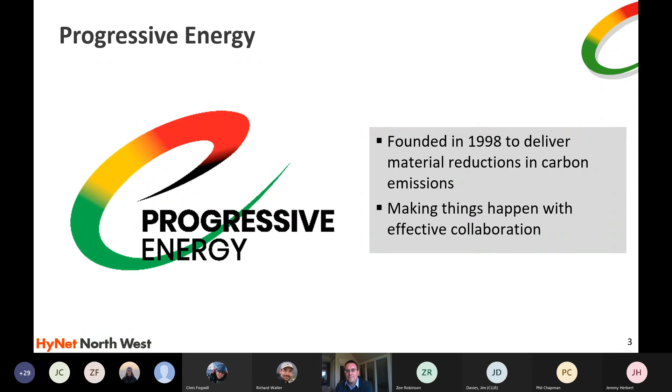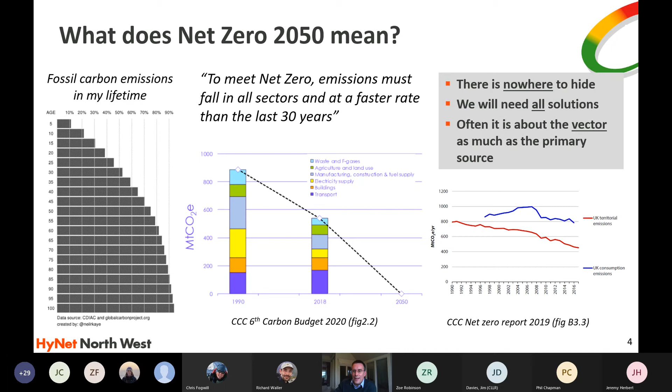But net zero, what does it mean? Net zero means there is nowhere to hide. When we had an 80% reduction, it was amazing how many organisations, sectors thought that they would get the remaining 20%. Actually now we need all the solutions in order to do it. And one of the themes in what I'm going to talk about today is it's not just about what the primary source of energy is, but it's about the vector that gets the energy from where it arises to where we need it. So I'm going to pick through some of the key energy demands that we have in the UK and look at what their drivers are to change them and what potential solutions there are.

So industry is a big emitter of CO2. Why does it need to tackle its carbon intensity requirements? Well, one is that there is now an increasing corporate and social responsibility that organisations are under in order to actually demonstrate that they're doing the right thing. That's driven quite significantly by customer demands. So customers actually want products, solutions that are low carbon, and investors want to invest in low carbon solutions.

But the other side of it is actually a really quite significant economic threat. Across the world, generally, particularly in the UK and in Europe, we are starting to price carbon. So if we emit carbon, you have to pay to do so. And when you look at the profitability of a lot of our organisations in the UK, so the profit margin they've got relative to the size of the carbon charges that they could get over the next 5 to 10 years, that really does place a significant economic threat. So industry needs to tackle it.

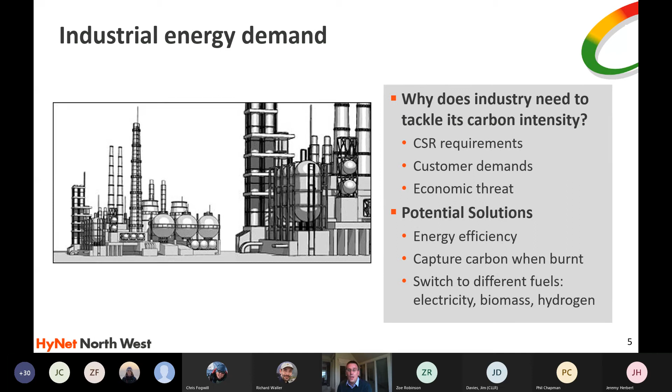What are the solutions? Well, obviously they can be more energy efficient. Where they have burnt or they have created carbon dioxide, they could capture it, or where they're using energy, they could switch to different fuels. So typically from natural gas, could go to electricity or to biomass or to hydrogen.

Let's pick another area, domestic heat. What are the challenges in decarbonising domestic heat? Now, the graph in the middle, I'm sorry, it's not terribly clear, but it's an old version of a graph that Robert Sansom did at Imperial College, must be over a decade ago now. There have been other versions of it since. But what you can see in red is actually the half-hour demand of gas over a year. And what you can see in grey is the half-hour demand of electricity across the year.

And we all tend to think that electricity demand varies quite significantly during the day and to some degree over the year, but mainly during the day. You know, when everyone comes home, they put the kettle on, they put the TV on, that kind of thing, then you get a bit of a spike. But look at it, the spike is nothing like the variation that you actually get on the gas network, both within a day, so in the middle of the night when no one's got their heating on, nobody's cooking, it's relatively low. Everybody gets up at a similar time in the day, massive firing up of boilers across the country, cookers going on, all sorts of things, and the same kind of thing at around tea time when people come home.

And then you look at the variation that you get during the year. You know, on a July summer at 3 a.m., there's hardly any gas flowing around the network. But in December, when it's bitterly cold and there's a high over the country, you can find the demand is enormous. So that is how the energy is currently being delivered. And 23 million homes in the UK are on gas. That's around 83% of them.

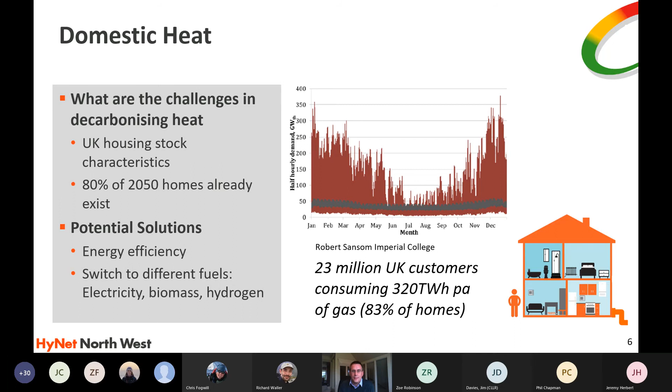Dispatchable power. So dispatchable power means power when we need it. We have had brilliant progress here in the UK in terms of our renewable electricity, an absolutely massive increase, and I'll show you some of the graphs in a little while. The challenge, of course, is that the sun doesn't always shine, the wind doesn't always blow. How do we balance the system? What happens when we've got a high over the country in winter and none of the wind turbines are moving, and yet it's very cold and we need energy?

Furthermore, how do we handle the increases? So we know electric vehicles are becoming increasingly how we get around, and we'll talk about that in a moment as well. And that's absolutely right, but that will add a burden to our electricity system, and heat pumps will also add another duty to that.

So how do we handle dispatchable power? Well, one is to look at our demand patterns and try to shift them. One is to store electricity. That's certainly possible, but actually batteries at grid scale haven't been fully developed yet and are very costly. We could have power generation we can bring online very rapidly. And currently we do that with natural gas. How can we do that in the future? I think 2 very key ways are either to use hydrogen for that power generation, or you generate from gas and you have CO2 capture.

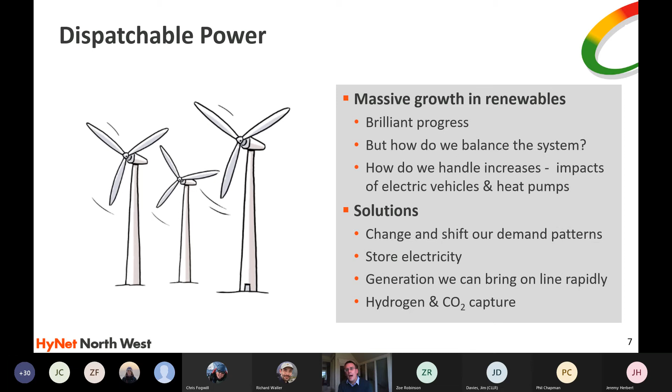So some of those key areas we've now covered: industrial, domestic heat, dispatchable power, and then the final one we're looking at is mobility. And electric vehicles are clearly gaining traction rapidly. We've had strong policy signals for that. I don't think in 20 years we will believe what we did today.

So the fact that in Oxford Street you might have effectively 1,000 small incinerators, combustors burning fossil fuel in the middle of a pedestrian-filled area in a city, which is what we are still doing today, will be as much an anathema in 20 or 30 years as it is that we used to burn coal and other smoky fuel for fires in cities in years gone by. I think that will move forward, and we will definitely see electrification. It makes a lot of sense.

But what about larger vehicles, buses, heavy goods vehicles, and even trains beyond electrification range? What are the challenges? They need a bigger range. They've got a charge time that they would need to handle. You know, a big HGV runs the risk of most of its payload becoming the battery that is there to power it. So what are the solutions?

So one is to find biofuels that can just drop in for what liquid fuels happen today, and we all do that at the moment. There's up to 10% biofuels that we find in our fuel mix today. But that only gets us so far.

Substitute, so CNG, compressed natural gas, and we can use bio-natural gas, so from anaerobic digestion. And we're seeing an increasing number of large trucks running on compressed bio-natural gas here in the UK, which is a good solution. But ultimately, the other one is potentially hydrogen too. So a range of solutions.

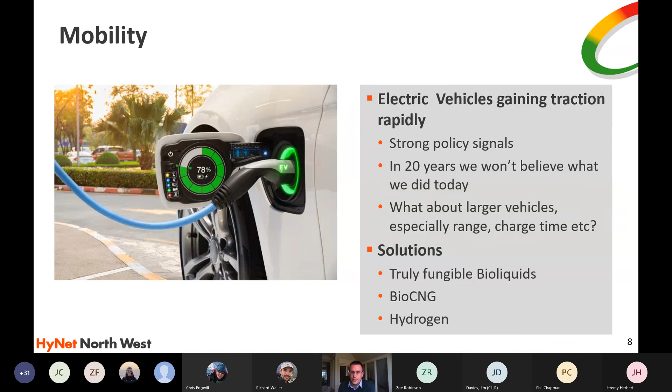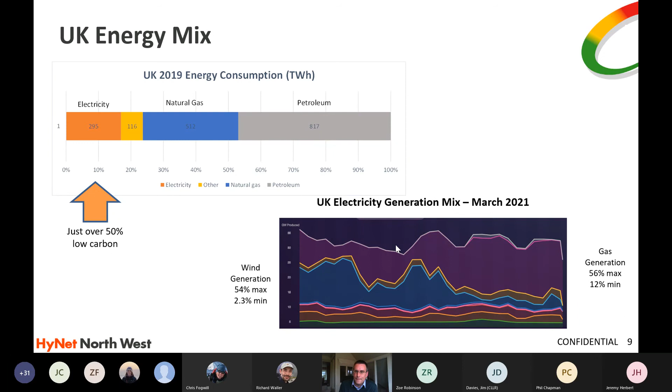Meanwhile, on the gas, which is this pinky one up here, 56% of it was at its max, but even at its minimum, it was still 12%. So looking at an annual figure is interesting, but you can see we've still got 90% of what's going on in our energy system is fossil derived. Looking on a month or a daily basis, the mix is constantly changing and we're needing to balance to deliver what it is that we need. And this is the challenge.

What have fossil fuels done for us? The trouble is they're absolutely brilliant. They're in plentiful supply. They're very energy dense and easy to transport. They're easy to store. They're pretty much always there when we need them. They are fundamentally cheap compared with other sources of energy. They're concentrated sunlight from millennia ago that have been turned into a product that is in one location, easy to get out, and provides a huge dense source of energy. And we've built the fabric of our society out of them.

So it's going to be a journey to wean ourselves off. This isn't something that you can just turn off and turn on again. If we doubled the amount of low carbon electricity we put on the system, we'd only make it from 10% of our system to around 20% of our system. So that's a huge change in electricity, but we'd still have 80% that we've got to try and tackle. The thing is, we have to find ourselves a way of weaning off, but it is going to be a journey.

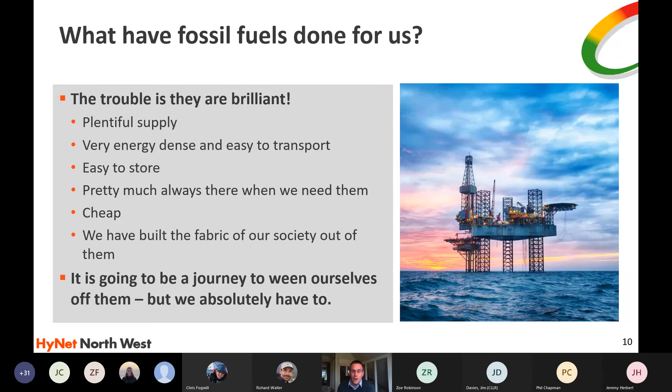And that journey has behavioural implications. We have really got used to cheap and ready energy. It was really interesting. I just took this photograph off the web. You could just go and buy a thermostat off there. Really interesting that the number on that is 22 degrees. I think if we talk to people from 20 or 30 years ago, the thought of keeping your home at 22 degrees would probably be alien to them. It is a good number of degrees higher than we used to have.

I mean, you look at this photo, it's not a great one, I'd seen a really good one somewhere, but I just wanted to show this one. This is a house clearly in winter because there are no leaves on the trees, and yet you see there are windows that are open. And I think generations before us, we tended to put jumpers on, we tended to keep the windows open, lots of air going on. We didn't keep ourselves quite so warm.

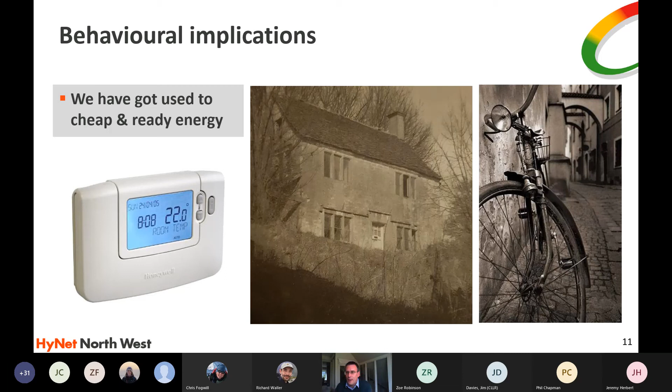And similarly, transportation. We used to walk, we used to jump on bikes. So there are going to be big behavioural implications that we're going to have to deal with as we move forward. And what we need is a suite of solutions. We need all the tools in the book to get us to net zero. So although I am now going to spend quite a bit of time talking about hydrogen and carbon capture and storage, we absolutely need energy efficiency. There is absolutely a role for our biomass resources, and there is a real role for electricity, but we need this suite of all of them to work together.

So let's talk about hydrogen. Low carbon hydrogen has now been recognised as one of the key tools in that toolbook. Whoever you look at, whether the Committee on Climate Change, National Grid scenarios, any number of consultants, or the recent government white paper, they are all clear that significant volumes of low carbon hydrogen are required. And those range from just under 200 to some even suggesting up to 500 terawatt hours of hydrogen.

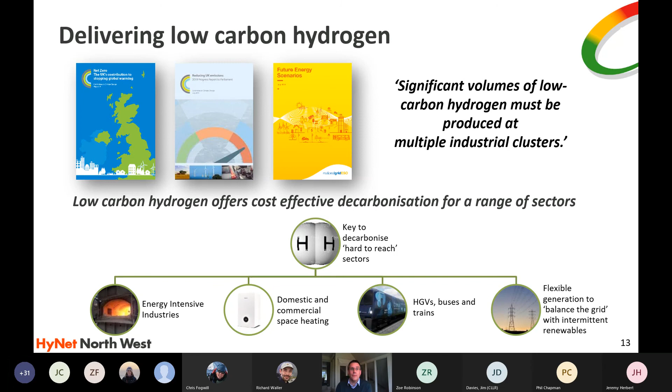Let me remind you, our domestic properties use around 300 terawatt hours across the UK. So we need as much hydrogen as is being delivered today to our domestic homes on the gas network system. And why is that? Because hydrogen gives you solutions for some of those areas I've talked about: energy intensive industries, domestic and commercial heating, transport for larger vehicles, and flexible generation to balance the grid, to enable more low carbon renewables by helping to balance them out.

Where do we get hydrogen from? Hydrogen, yes, is an abundant element, but it is not necessarily there in ways that we can use and that give us energy. So yes, water contains H2O, but we need to extract it. In that regard, hydrogen can be a source of energy, but is also importantly a vector by which energy is transferred. So there are a number of types of hydrogen. I'm going to talk briefly about them.

One, commonly called blue hydrogen, is taking the hydrogen out of something like methane and then storing the CO2. So we take methane from a gas field where it's been stored for millennia. We take the hydrogen, and then we put the CO2 back where that methane came from, back into those offshore reservoirs, and then we have the hydrogen that we can use. That's done by a number of reforming processes, and that can be done very efficiently. Up to 97% capture rate of the CO2 can be achieved.

So that's one approach. Another approach is electrolysis, taking the hydrogen in water, using electricity to split it, and then taking the hydrogen. Clearly, if it's using renewable electricity, then it is a low carbon solution. And potentially, we may be able to take the hydrogen out of biomass. Biomass, like all organic matter, is made of carbon, hydrogen, oxygen, and a few other things, and using biological or thermal processes we convert that into what's called a synthesis gas, and then upgrade that to hydrogen and CO2.

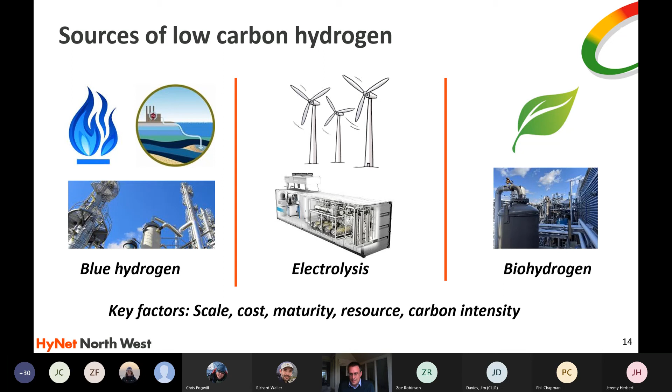Take the CO2, and then you can take the hydrogen, and then you can either just release the CO2, or better still, store the CO2, at which point, as we'll learn a little bit later, that is considered a greenhouse gas removal technique. And the key thing in determining which of these sources we use are issues like scale, cost, maturity. Do we have the resources? What are the carbon intensities? And that's one of the things that we'll cover as we go through this presentation.

I talked about that build up to get that 300 terawatt hours of hydrogen. Here I've just shown how that could build up over time and in the different sectors. So you can see industrials over time become quite a significant and important part, particularly in the 2030s, of consumers of hydrogen, and I'll show you some of the work we're doing on there. Similarly for CHP and power applications.

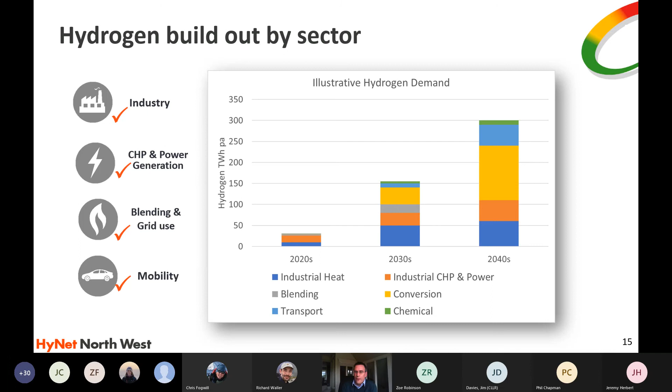You can see there's this grey area which is blending. So this is what we've done at Keele, and the project at Keele has really unlocked that. That plays a role particularly during the 20s, rising to the 30s. But then here we could envisage that parts of our gas network today using methane could convert and operate on hydrogen, and that is the yellow area that I've shown there. Then the light blue, a role for transport increasing, and then we do use hydrogen today in chemical solutions, and clearly using low carbon hydrogen is really important. So that's just a view as to how the role of hydrogen might build up by the end uses.

I'm now going to talk to you about HyNet. This is the project that we've been leading, and I'd like to consider this as a case study as to how hydrogen can be involved across our energy system. Now, this is what's called a low carbon industrial cluster, which is based, as you can see, in the Liverpool-Manchester part of the country up in the northwest. But it's also worth saying that there are other clusters around the country, in Humberside, Teesside, up in Scotland, also in South Wales, looking to do similar things, although I think the HyNet one is by far the most advanced and has hydrogen most embedded into how it is structured.

So what we have here in this cartoon, and it is a cartoon, but it shows schematically what's going on, is at the heart of it, we have a hydrogen production facility, which is taking natural gas and converting that natural gas into hydrogen and CO2. The CO2 is going down this orange pipeline, which currently is a natural gas pipeline from a gas field in the Liverpool Bay, which is currently producing natural gas and bringing it onshore, but is reaching the end of its economic life now and is absolutely suited to be repurposed as a store of CO2 flowing back down in this direction. There is a short amount of new pipeline to be built, but most of that pipeline exists, and the offshore assets already exist.

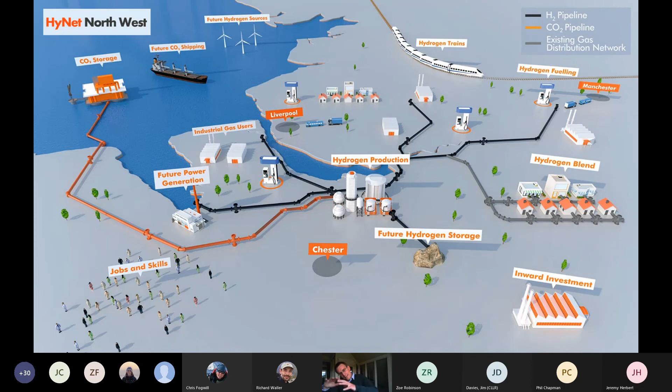So this is the map of this HyNet vision that we have put together and we are now delivering. So it is the UK's leading hydrogen and CCUS project. The government has its 10-point plan. It has set certain targets in terms of how much hydrogen production it wants by 2030 and how much CO2 it wants to store using the kind of geological formations we've talked about.

And HyNet can deliver around 80% of that hydrogen production target and potentially up to 100% of that CO2 storage target. It also has the prospect of potentially bringing home to the UK's first hydrogen village or hydrogen town actually being dedicated on 100% hydrogen, which is another part of that 10-point plan.

Now, I said earlier, Progressive is a relatively small company. We achieve what we do by working with other people. And these are some of the big organisations based up in the Northwest that we are actually partnered with in terms of delivery of the plan. And I'll show you what role they have as we go forward.

So we talked about the carbon capture and storage infrastructure. This we are developing with Eni. So Eni is the Italian state oil and gas company. Huge amount of work they've done looking at the offshore reservoirs that have been gas tight for millennia and we've used to produce natural gas as to their suitability for putting CO2 and storing it again.

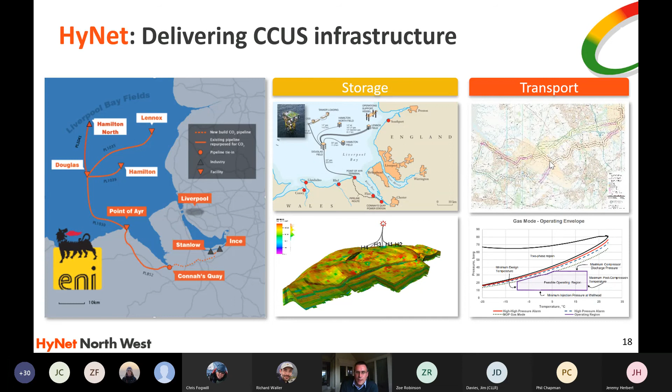An important part of that is not just taking CO2 from hydrogen production, but actually from some of our big industrials that produce CO2, not because of the fuel that they use, but because of the chemistry of what they're doing. And so we've got a fertilizer plant that will be putting nearly 400,000 tons of CO2 into the system. We're working with Hanson Cement Industry, who have CO2 production from their facilities that will link into the CO2 pipeline.

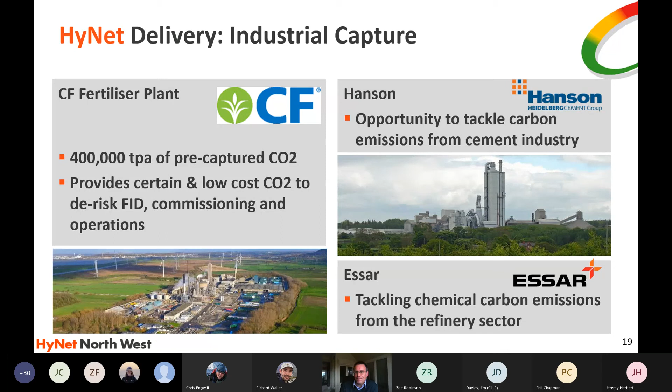And there is a big refinery up in the Northwest where some of their CO2, again, is chemical as part of their cracker. And we're working with them to capture around 800,000 tons of CO2 from that process to go into the infrastructure. But as I said earlier, at the heart of what we've got in HyNet is large-scale hydrogen production. And we're working with Johnson Matthey, UK company with world-leading technology for converting natural gas into low-carbon hydrogen, separating out the CO2, as I said earlier, with a 97% capture rate, so very high capture rate of CO2, which is then put into the infrastructure.

We're working with a large engineering contractor, SNC-Lavalin, and we're currently doing what's called front-end engineering design. So it's a FEED program that enables us to define the design of that plant. And we are in partnership with Essar, who own the refinery up there, and looking to build not only this first line, which we're working on at the moment, which will produce 3 terawatt hours of hydrogen. So come back to that 300 that we were aiming for. This is the first 1%.

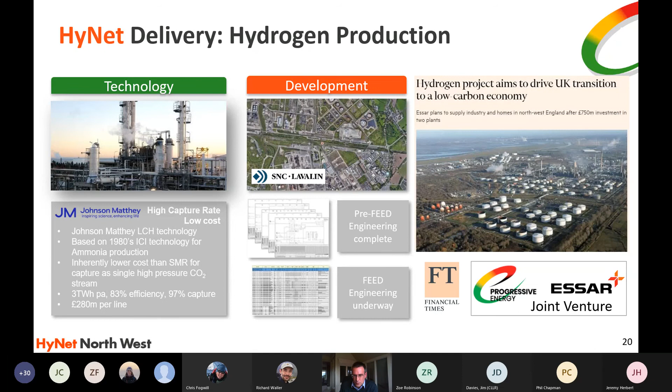But interestingly, this is of the order of magnitude of the amount of biomethane that is produced in the UK. And this is just from one plant. But actually, then we'll be looking to build a second line at double the scale pretty soon after, and then 2 larger ones that will come after that. So that's the hydrogen production.

And then we have this hydrogen distribution and storage infrastructure, which we're working with Cadent. So Cadent work in the Keele region, and they also work in the Northwest, and they will be building an 80-kilometre hydrogen pipeline system that connects the production to all those users that we talked about, and also to the storage. And then we're working with the partners, part of the INEOS company with Inovyn, who own the fields that are being used for the hydrogen storage.

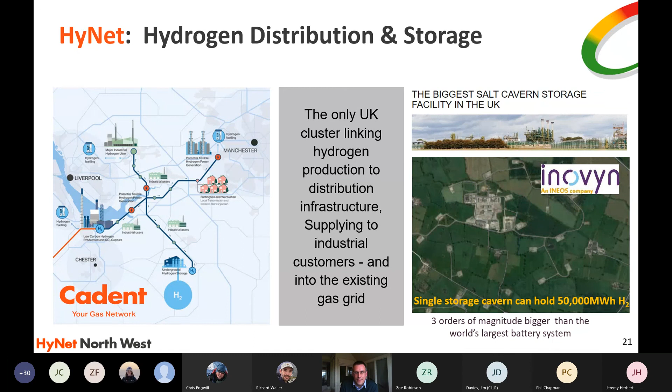We will be storing 1 terawatt hour of hydrogen. So that is equivalent to 1/3 of a year of production from that first line. And again, just to put it in context, that terawatt hour of hydrogen storage is 1,000 times bigger than the world's largest battery. So huge opportunity for storing energy simply and at low cost.

And we've done a big piece of work with a UK burner manufacturer to demonstrate that a big boiler, a big burner, could operate on 100% hydrogen. And that's because we're doing some trials with Unilever at Port Sunlight. So Unilever make a lot of the bathroom and kitchen products that we have around the UK. They want to take one of their really big boilers, which is significantly larger than, sort of 300 times larger than a domestic boiler, and operate that on hydrogen, as well as a blend.

And we're also working with Pilkington. So Pilkington's a glass manufacturer. Now they make sheet glass up in St Helens, and we will be working with them on one of their huge furnaces, which is yet another order of magnitude bigger. So we're now sort of thousands of times bigger than a domestic boiler, using hydrogen for making their float glass.

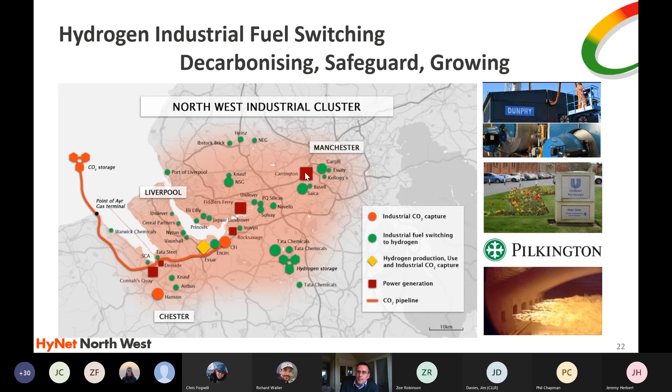Now, blending into the gas grid. Now, this is something that's obviously close to Keele's heart. So this is taking hydrogen, mixing it with the natural gas that goes into the grid, and then delivering it to consumers. And the idea is to be blending at a level where neither the consumers nor the network have to make any changes. And it's a key enabling step in unlocking the hydrogen infrastructure. So it's a non-disruptive way of doing it, so nobody has to change anything in their homes, and it's a low-cost solution for early adoption.

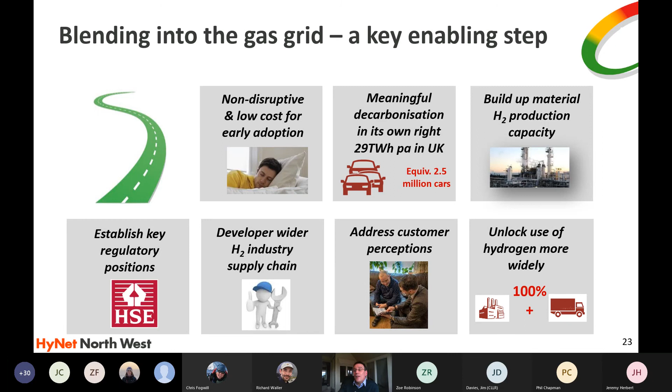It actually saves a meaningful amount of carbon in its own right. It's equivalent to taking 2.5 million cars off the road. It helps us build up hydrogen production capacity, allows us to work with the regulators, the HSE, who are hugely important in this, to keep us all safe, and therefore understand the position with blending, and as a stepping stone towards potentially converting to 100%. We build up the supply chain. We help customers get used to the fact that hydrogen will become part of our energy mix, and of course unlocks the use of hydrogen more widely.

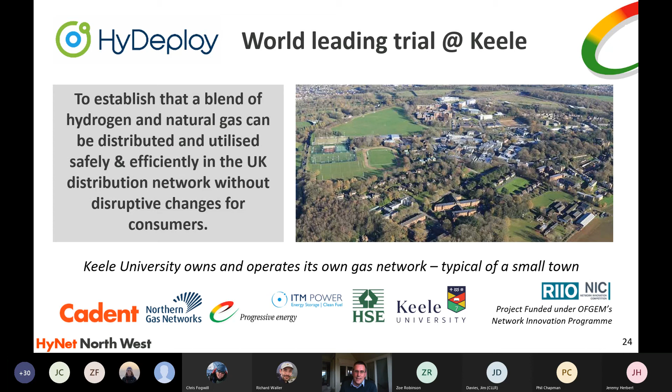So we've done this world-leading trial at Keele. It's been brilliant to partner with Keele on this. So you have effectively your own gas network, which is typical of a small town. So we took an area of your network of around 100 domestic properties and about 30 of the university buildings. So quite big commercial applications there. And the purpose of that trial was to demonstrate that a blend of hydrogen and natural gas can be distributed and used safely in the UK network without disruption for consumers. So that was the objective of the project.

We had to build the safety case. The UK has a brilliant safety and regulatory regime, and therefore we had to present evidence to the Health and Safety Executive that running at the 20% volume is as safe as natural gas. So we ended up doing around 18 months of extensive, rigorous research, including work that we did at Keele, including work we did with the health and safety laboratories in Buxton, in order to make that case, and then we secured permission for blending in November 2018.

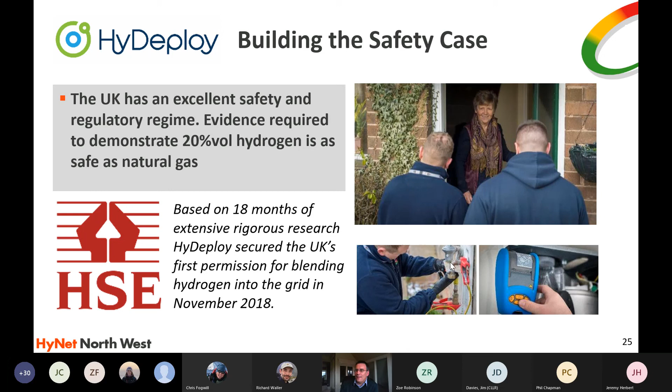And again, this was some of the work we did going around testing existing properties and existing equipment and appliances at Keele University. Having done that, we built out the facilities, and those of you based at Keele will probably be familiar with the pictures on the left of the compound which we have there, and the good work that we did with people like Paul Richards and the estates team to actually construct that equipment. So that includes an electrolyzer to make hydrogen, which then gets put into a small intermediary store before it was then blended in this facility to go out onto the network. And then we had various tests, it being a proper testing research project.

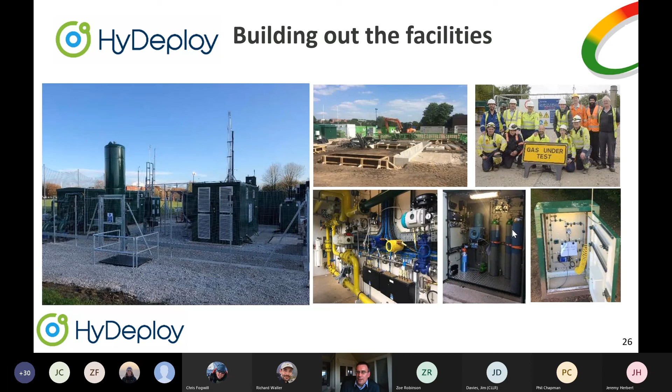We were also testing composition out on the network and took various other measurements. And then we operated, and we were operating for over 15 months. It was slightly longer than we'd intended because of COVID, but we did that, and we finished in March this year. And in fact, we are now pulling together all of the results from that, and we're really looking forward to being able to share those with our friends at Keele, but also more widely as well, because this project is seen as being really key.

One of the things we did do down in one of your big boiler houses was to take 8 boilers from 4 different manufacturers. One of each boiler was running on natural gas, one was on the blend, and those boilers were run really hard over the 15 months, effectively equivalent of pretty much a lifetime of boiler use. We've taken those off the wall. Those have now been sent to the various boiler manufacturers. Their mission is to first of all identify which boiler was running on natural gas and which one was on the blend, and if they could tell any difference.

Now, those manufacturers stood behind the boilers in people's homes for the purposes of the trial. This is about establishing that for long life, over rolling this out, they can stand behind those warranties as they sell those products. So we're collecting that data now. We had good operation, we had good network composition, and we've had no increase in leaks or faults on the network. So overall, it's been a really good project and some fantastic feedback. One of the customers said, you know, I'm contributing by doing nothing. Where else do you get to do that? So it's saving carbon by not having to make major changes.

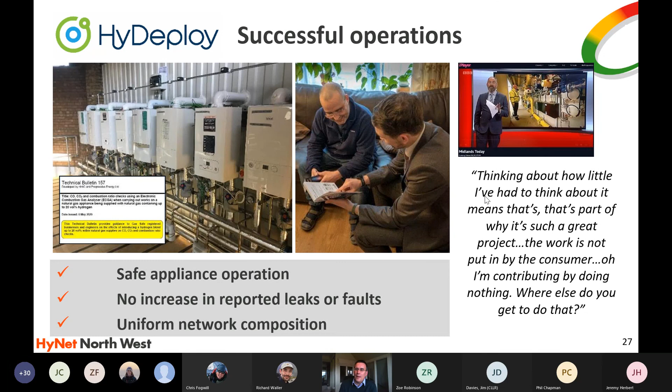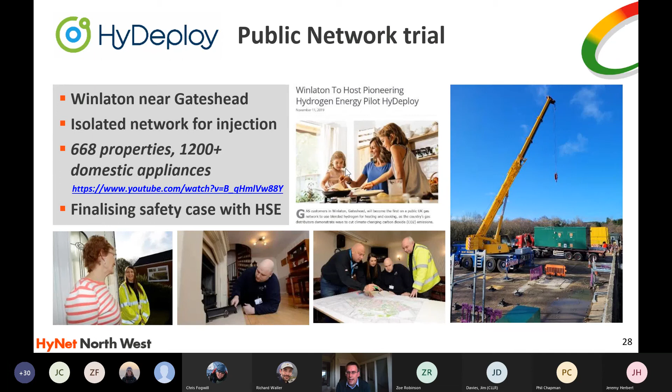So where does that lead us on to? Well, in fact, in Winlaton near Gateshead, we will be running a similar demonstration program on over 650 properties up in the northeast. So that will be over 1,200 domestic appliances. There's a really nice video from somebody involved in that, which if you just put Winlaton and NGN, so that's Northern Gas Networks, into YouTube search, you should find. Currently, we're finalising the safety case with the Health and Safety Executive, building on all the really good work done at Keele. And we're looking forward to starting to operate there, subject to getting the safety case from the HSE in the next few months.

And as I said, blending is a journey to 100% grid conversion. So boiler manufacturers here in the UK, Baxi and Worcester Bosch are the most well-known ones, have already developed hydrogen-ready boilers. So these are boilers you could go and buy today, run on natural gas, and if we end up with the transition over to 100% hydrogen, relatively straightforwardly with a gas engineer turning up, quarter of an hour, half an hour, they can just turn that over and convert it to run on hydrogen.

So there's lots of work being done in the UK, some big programs looking at the kind of safety cases we've put together for Keele, but for 100% hydrogen. And as part of that 10-point plan from Boris, we are looking to see a hydrogen neighbourhood by 23, a full hydrogen village by 25, and a town by 2030. This is a journey that we can be on and that can help decarbonise parts of our system.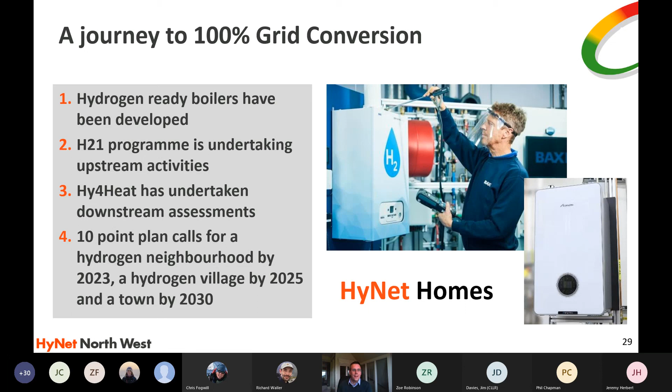Now, as I said earlier, I would love to see heat pumps playing the role that they need to play. New build properties, I can see they have a really key role. Properties that we can insulate well and effectively, they have a key role too. But there's a tranche of properties for which I think hydrogen offers a solution of direct, rapid heating, allowing us to get the heat into properties at the time that we need it. We need a patchwork. We need a mixture of all of these solutions.

One final thing before I close is called greenhouse gas removal technologies, GGR. So when you look at what the Committee on Climate Change has reviewed that we need to do to meet our net zero targets, we will achieve a lot by saving carbon from actually going out into the atmosphere. But at the end of the day, we're also going to need some ways of effectively removing carbon dioxide from our biosphere. And how can we do that? So one way is what's called direct air capture. And on the right-hand side, there are some schematics of ones that were produced by the IMechE a number of years ago.

They're supposed to take CO2 from the air, capture it, and then take it away and sequester it. Now, the challenge with that is that air is just around 400 parts per million CO2. Now, that's a major problem, and it's the fact that it's going so high that it's causing a problem. But from a chemistry perspective, capturing that CO2 at atmospheric pressure is really quite difficult.

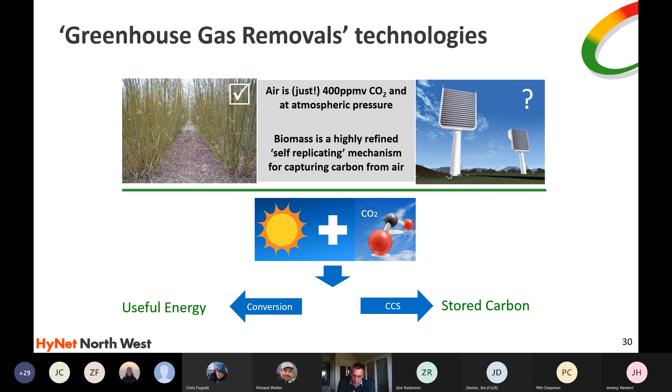But fundamentally, trees have been doing it for millennia. Biomass is a highly refined, self-replicating mechanism for capturing carbon from the air through photosynthesis. So what we can do is we can grow. Here I've shown willow, but it can actually be other sources of biomass, potentially sources of biomass that have a first use, say in construction. But then at the end of their life, you could take that biomass and get both useful energy from it and potentially store carbon.

So what I've got here is an example of a project we're working on, which will also be up in the Northwest, called Project Bright. This is going to take refuse-derived fuel and potentially unrecyclable wood and convert it, mainly into a substitute natural gas. That will reject a certain amount of CO2, which will then go into our sequestration system and will therefore be effectively taking CO2 out of the atmosphere, which has been captured by the biomass and the plants.

We will then take from that some energy that we need, but also take the CO2 and store it. Now, if we're making methane, then just a bit more than half of the CO2 still comes out at the point of use when you burn the methane. Clearly, if we make hydrogen, which is the alternative vector we could make, you could capture all of that CO2 and store it. And effectively, you are taking carbon out of the biosphere rather than from fossil fuel resources. So that's the plan up there, which is another part of looking to achieve our net zero goal. That's based on technology which is currently finalising construction down in Swindon as a reference facility, which we're very excited about, with one of the partners that we're working with.

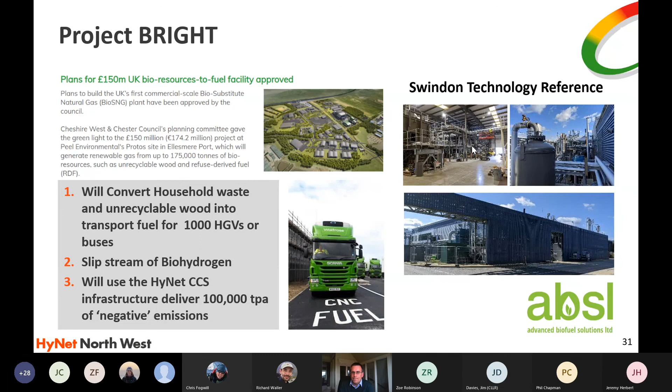So how does that all fit together? We started working on HyNet back in 2016. We're currently in 2021, so you can see there's been a pretty big journey to get to where we are now. We are just completing the engineering FEED on the hydrogen production plant, and we're just starting the FEED and consenting process for the CO2 infrastructure. So we'll be looking to make investment decisions on both of those at the back end of next year, early 2023, to allow us to be operating our first hydrogen production line and our CO2 infrastructure by 2025. We've had really good support from BEIS, the government department, and now we're working with them on the policy regime to actually see this all built.

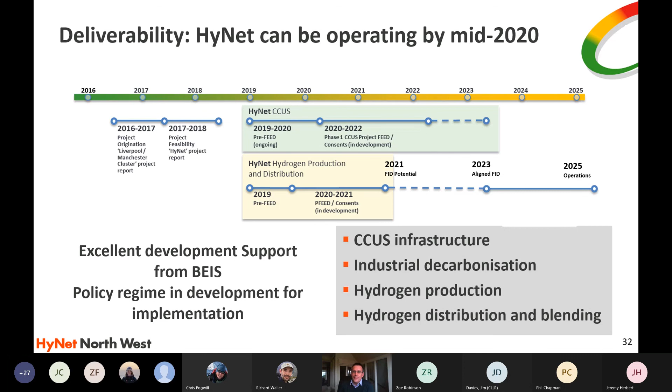So what does that do? We've talked about the carbon implications of what we're doing. It also underpins economic growth. It underpins jobs, safeguards jobs that are there, and brings inward investment into the region. The UK has got some fantastic skills based on its offshore oil and gas experience, as well as its chemical industries leadership. Those skills we can hone, and then we can be not only doing it here in the UK, but translating it further afield.

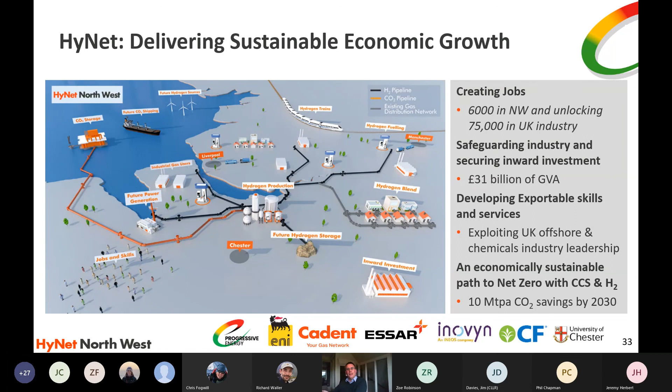And fundamentally, it gives us a sustainable path to net zero using CCS and hydrogen as part of that transition, from relying on fossil fuel and letting the carbon go to the atmosphere, to using fossil fuels where we then deal with the carbon, to ultimately moving into green and other forms of hydrogen, which will slowly take their place in our energy mix to give us the solutions that we need over time. So, can we solve it? Yeah, I believe we can.

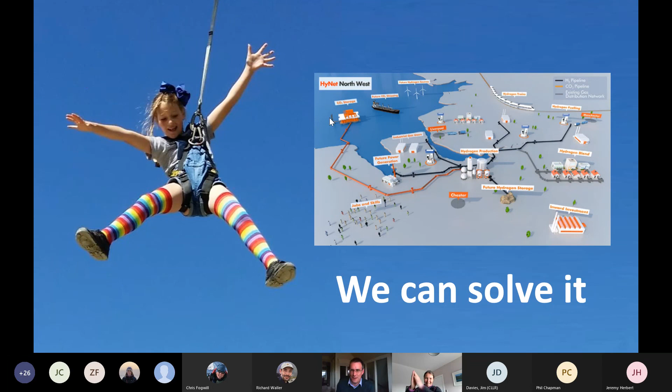Good. Zoe, sorry, that went on probably just a few minutes longer than I intended to, but hopefully that's given everybody what they need. Super. Thank you very much, Chris. And I'm sure you can hear the rapturous round of applause.

No, fantastic. I think such a positive talk and a positive view in terms of the trajectory we're on, and actually saying there are solutions that are being actively worked on.